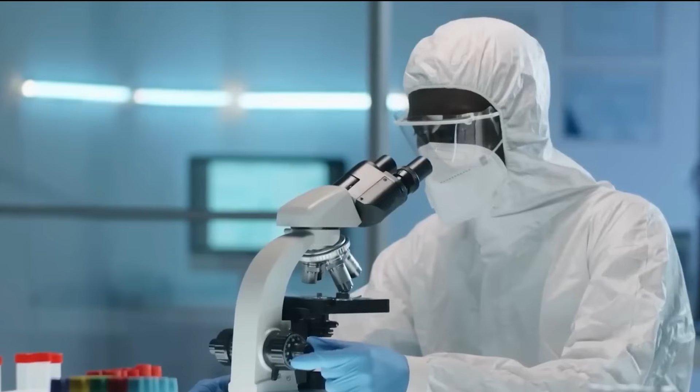They engineered a synthetic, biomimetic breakthrough using agricultural waste and polymer bonding. It does not just mimic wood, it completely outperforms it. This material is entirely fireproof, waterproof, and costs a fraction of the price, terrifying global timber giants.

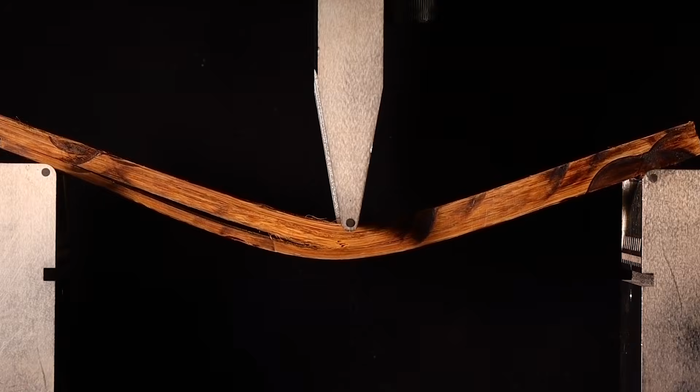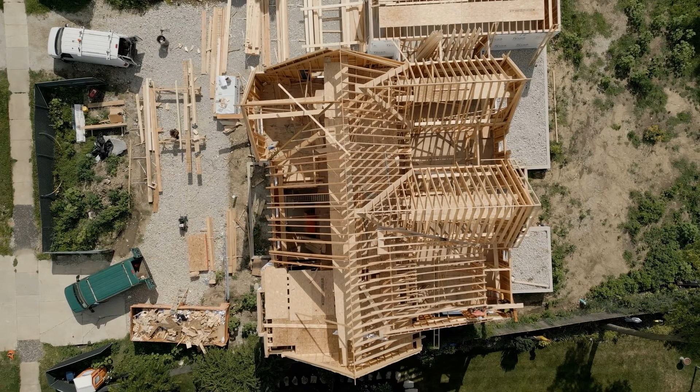To understand why this new discovery is such a massive deal, you first have to appreciate why timber has held an absolute monopoly on human construction for thousands of years. It's not just because trees grow out of the ground for free. It's because wood is genuinely one of the most mechanically brilliant materials ever created. On a microscopic level, it's a masterpiece of natural engineering.

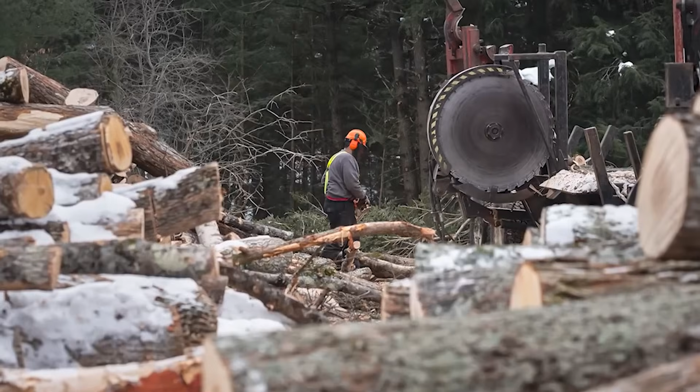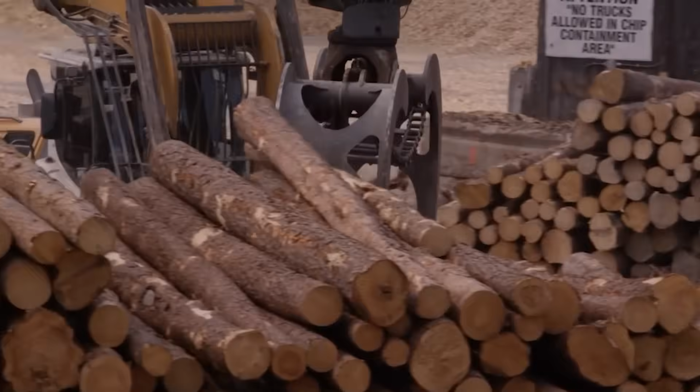Wood is made of long cellulose fibers bound together by a rigid organic polymer called lignin. This exact blueprint gives it a phenomenal strength-to-weight ratio. It can bear immense vertical loads while remaining flexible enough to bend during high winds or minor earthquakes. It acts as a natural carbon sink, provides exceptional insulation, and can be shaped with basic hand tools.

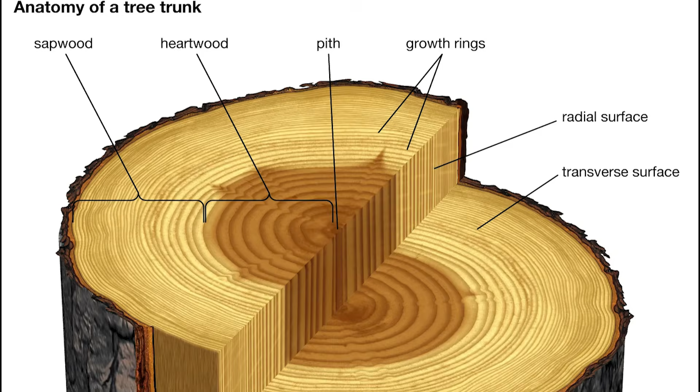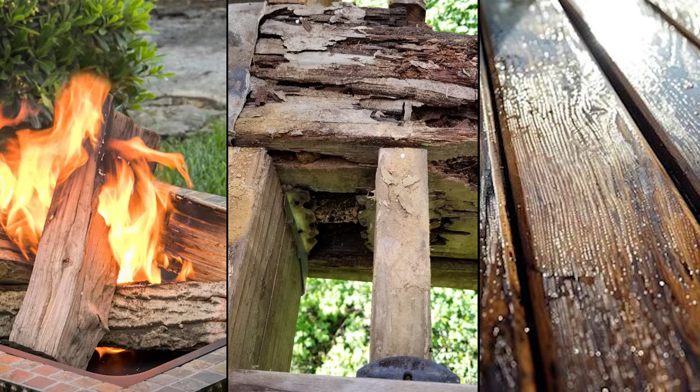For most of human history, nothing else came close, but wood has a massive built-in structural flaw: biology. Because it's organic, it rots. It warps when it gets wet. It treats fire as fuel. And worse, it takes decades for a tree to mature enough to be harvested for high-grade structural lumber.

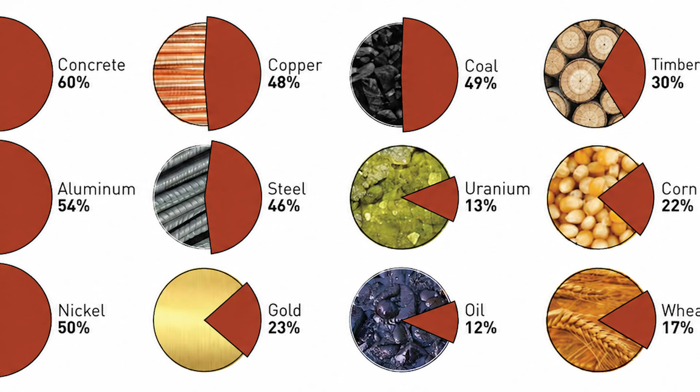Think about the sheer scale of modern development. China alone, in its massive push for urbanization over the last 2 decades, consumed more raw timber and building materials than Western Europe used in an entire century. The planet simply can't grow trees fast enough to keep up with that velocity.

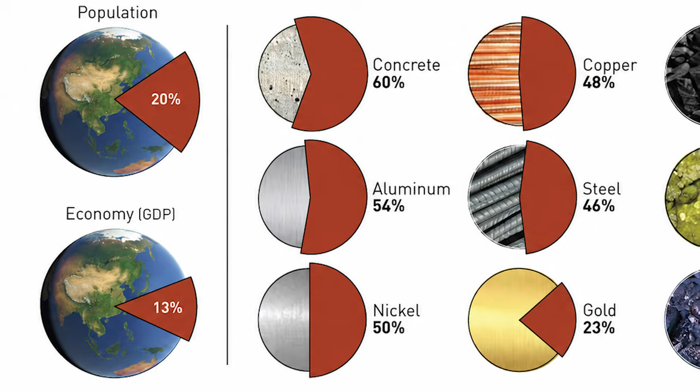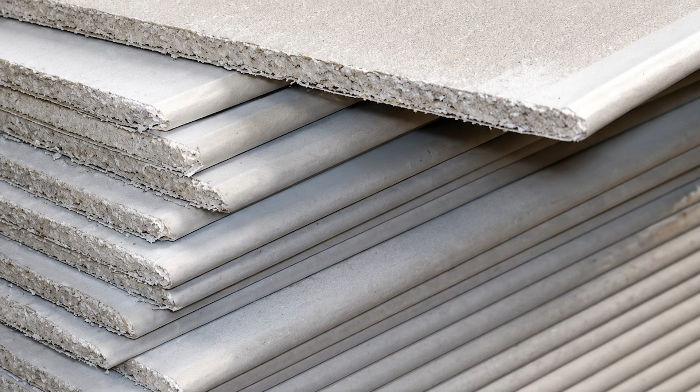For years, scientists tried to create alternatives, like wood plastic composites and fiber cement boards, but they failed fundamentally. They were either too heavy, structurally weak under tension, toxic to recycle, or too expensive to compete with a raw log. The question left for engineers was simple. What if the mistake wasn't trying to copy what wood looks like, but failing to replicate how it behaves at a molecular level?

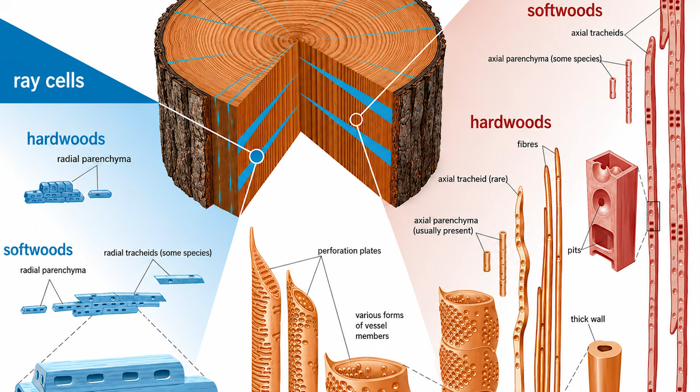To understand this breakthrough, you have to look at how a tree actually grows. Natural wood is basically a massive network of microscopic tubes, all aligned in a single direction. That alignment is exactly why a log is incredibly strong along the grain, but splits wide open if you hit it across the grain. A research team at the Chinese Academy of Forestry decided to completely hack this organic geometry.

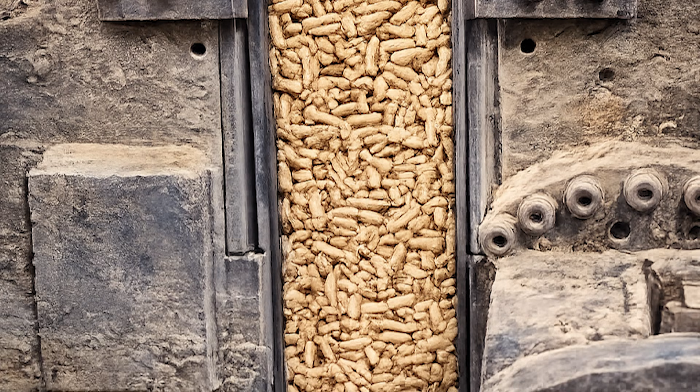Instead of cutting down old forests, they harvested agricultural waste, leftover wheat straw, hemp, and processing scraps from fast-growing bamboo. They stripped this waste down to its raw cellulose fibers. Normally, when factories make synthetic boards, they just mix loose fibers with glue and randomly press them together. It's weak. The Chinese team did something radical.

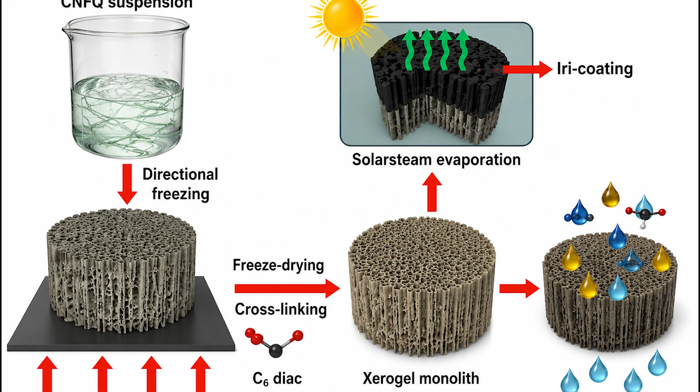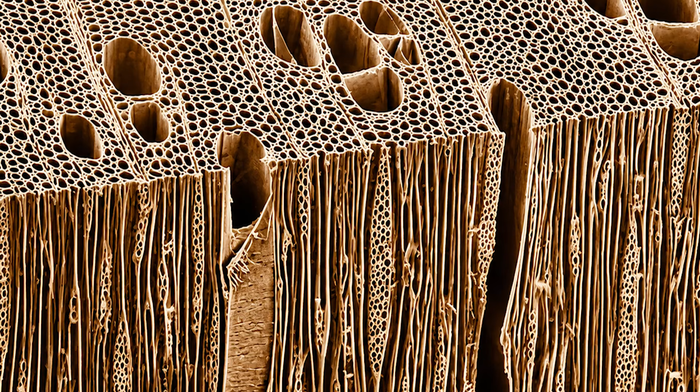They passed a liquefied fiber slurry through a specialized directional freezing process. As the water froze, it forced the raw fibers into perfectly straight, parallel channels, perfectly mirroring the microscopic grain of a 200-year-old oak tree. Next, they infused this perfect matrix with a biosourced resin and blasted it with high-pressure steam.

Under immense heat, the resin didn't just coat the fibers, it cross-linked with them chemically, simulating millions of years of natural petrification in mere hours. The result? The material's internal gaps dropped by over 80%.

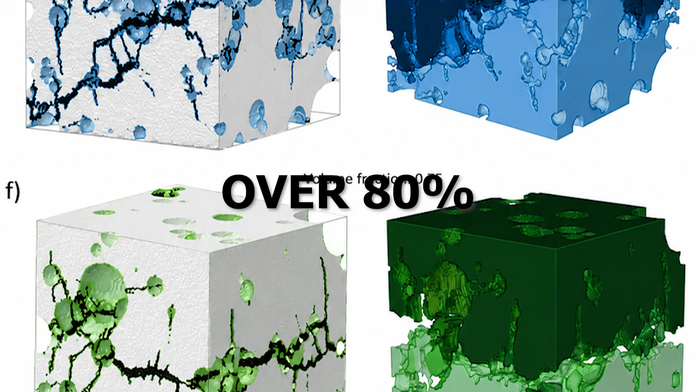This matters because those microscopic gaps are where every single wood problem begins. It's where water seeps in to cause rot, where termites crawl, and where oxygen hides to feed a fire. By crushing those voids, they eliminated wood's greatest weaknesses in one move.

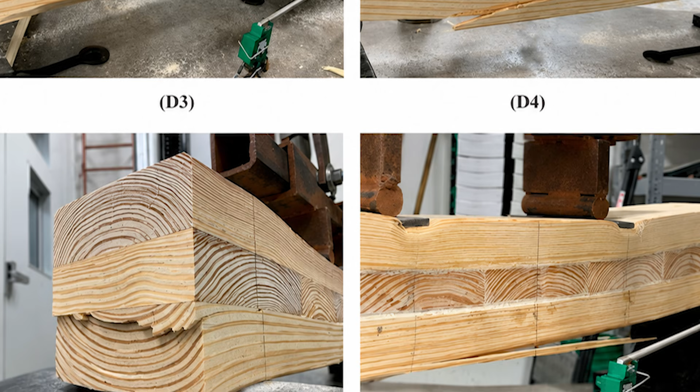Laboratory tests showed a tensile strength 120% higher than hardwood and a Class A fire rating. It literally refuses to hold a flame. The best part? It locks up agricultural carbon that would otherwise be burned in fields.

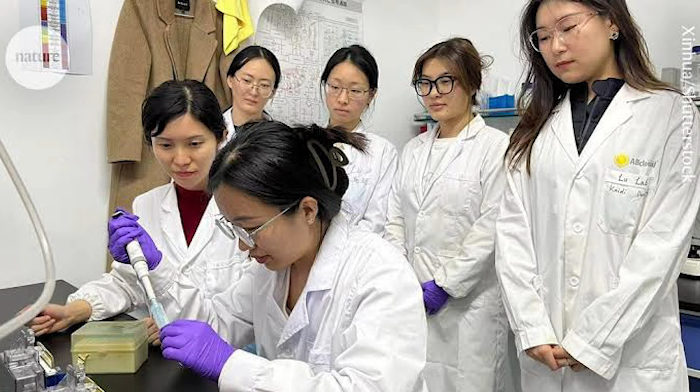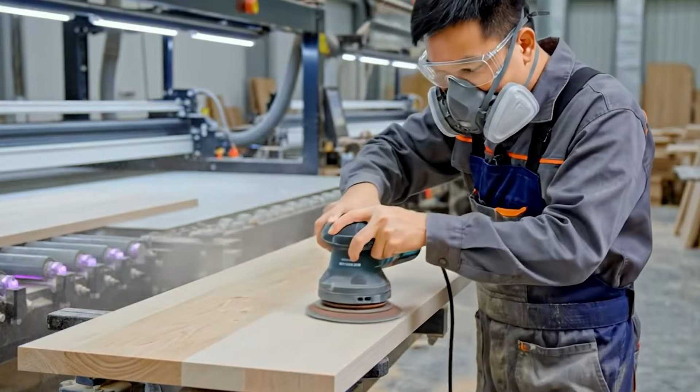While scientists were busy publishing papers on this biomimetic wood breakthrough, a completely different disruption was quietly happening right next to them. And this one didn't just rethink what we build with, it completely rewrote how fast a building can be put together. It's called hyper-compressed bamboo fiber tooling, and advanced infrastructure firms in southern China are already scaling it up.

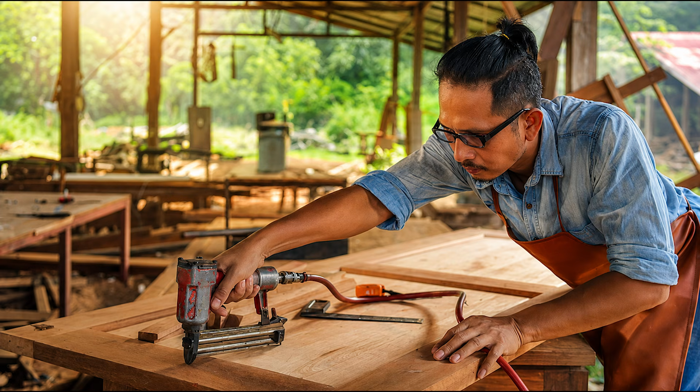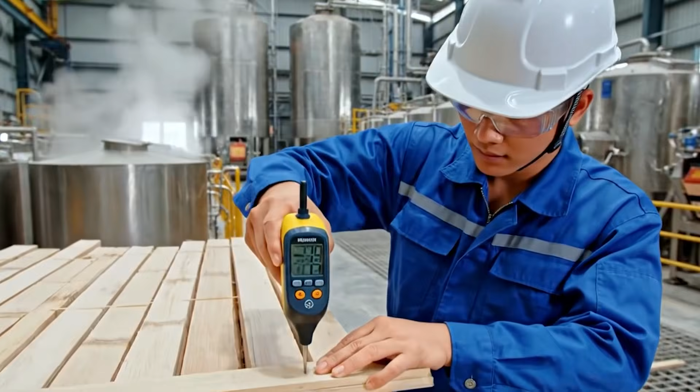Think about traditional timber. It's slow. You need heavy carpentry, precise kiln drying, and weeks of on-site prep just to stop the wood from warping. This new method skips all of that by treating engineered biowood like a high-tech polymer. The material is extruded straight out of the machine into massive, interlocking tongue-and-groove panels. They even stamp internal channels for electrical wiring and insulation right into the core during the press.

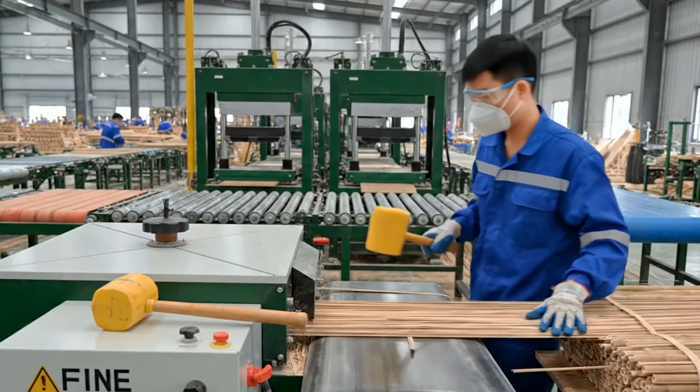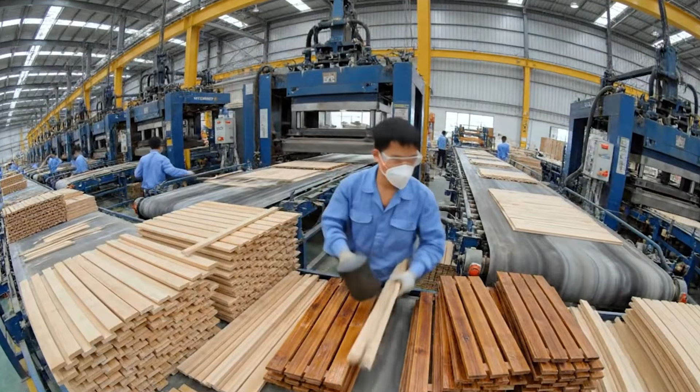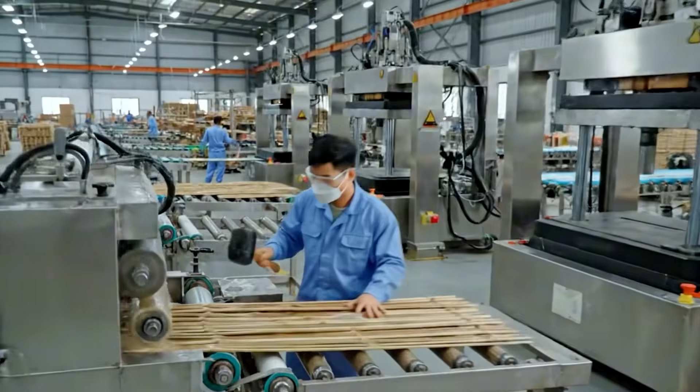But here is the real game changer: how it handles environmental stress. In humid tropical zones or coastal climates, normal wood is a maintenance nightmare. It warps, rots, and needs constant chemical sprays that leak into the soil. This material? It doesn't react to moisture at all. In testing chambers, even after being fully submerged in salt water for a year, its structural variance was less than a fraction of a millimeter.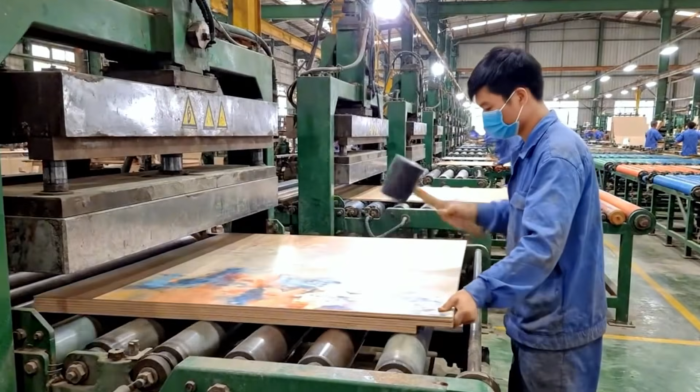When you fuse raw strength with lightning-fast assembly, the economic impact shifts entirely. That undeniable math is exactly why global markets are scrambling to lock down the rights. In the global commodities market, sentiment doesn't matter. Idealism doesn't alter supply chains. Only math does. Normally, changing international building codes takes decades. Why? Because when structural materials fail, the cost is measured in human lives.

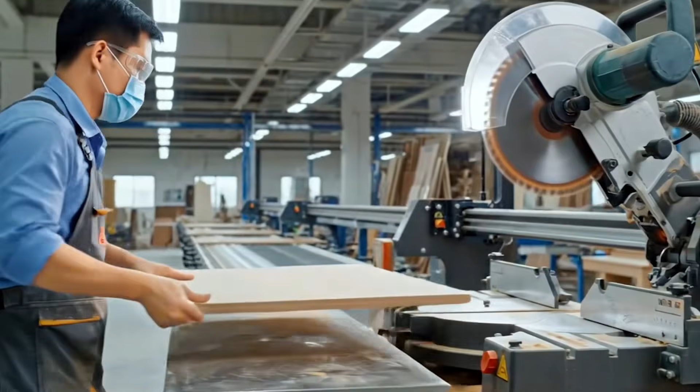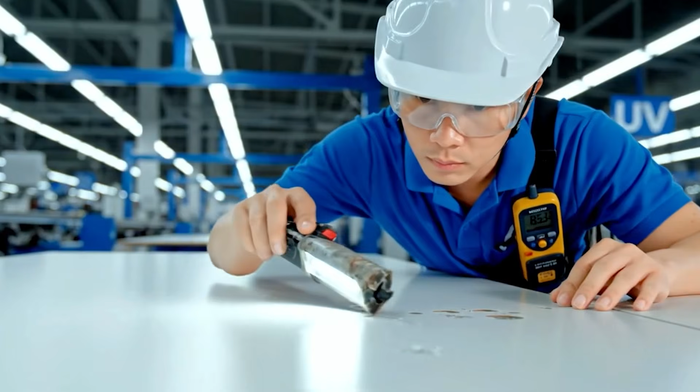Yet right now, Western markets are completely skipping the usual hesitation. Look at the receipts. Trade data confirms a massive spike in export volumes of these advanced biocomposites shipping straight out of Ningbo, China, to major distribution networks across Germany, Japan, and the UK. Major Scandinavian furniture giants and European prefab developers have already signed long-term procurement deals to integrate these synthetic beams.

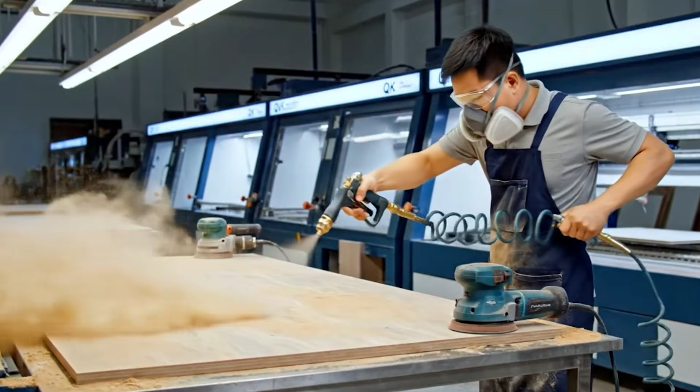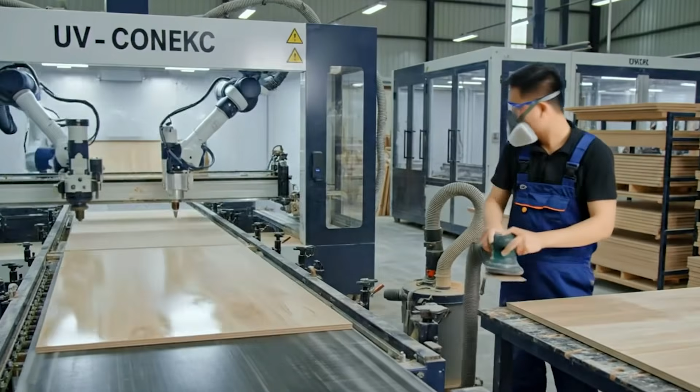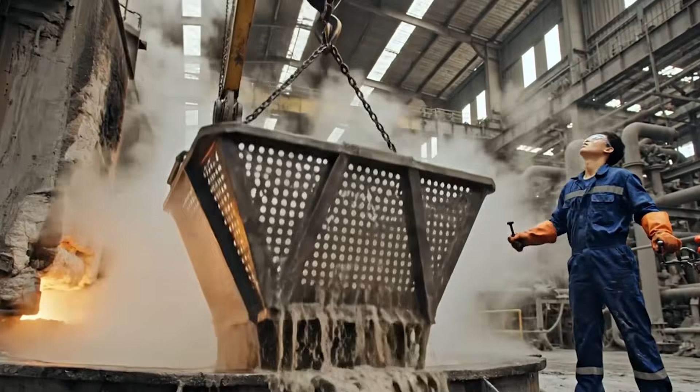Why the sudden rush? It isn't because these corporations suddenly grew a conscience. It's because in regions with strict carbon taxes, swapping old-growth timber for certified carbon-negative agricultural waste slashes regulatory costs overnight. If we replaced just 25% of global timber demand with this compressed biomaterial, we would save roughly 3.7 billion trees a year. That offsets more carbon than taking every single diesel truck in North America off the road permanently.

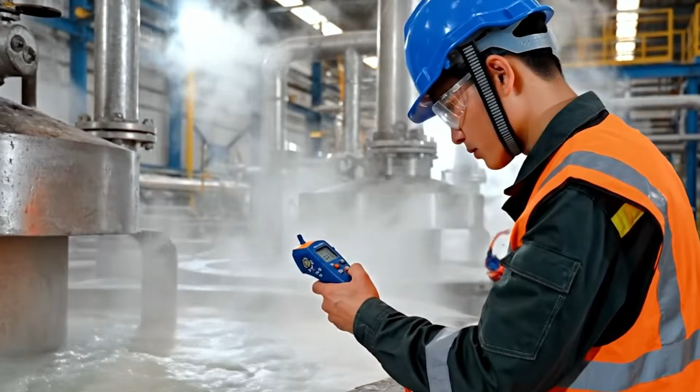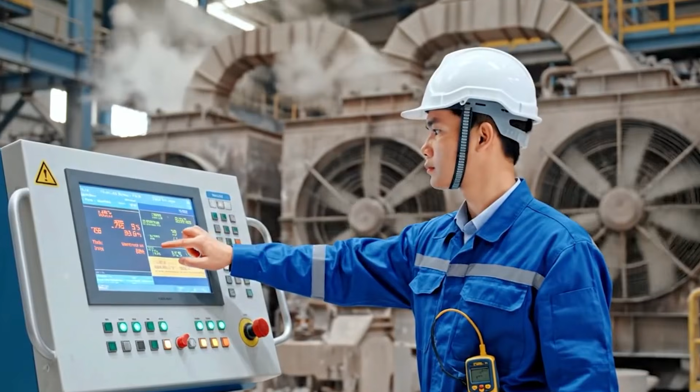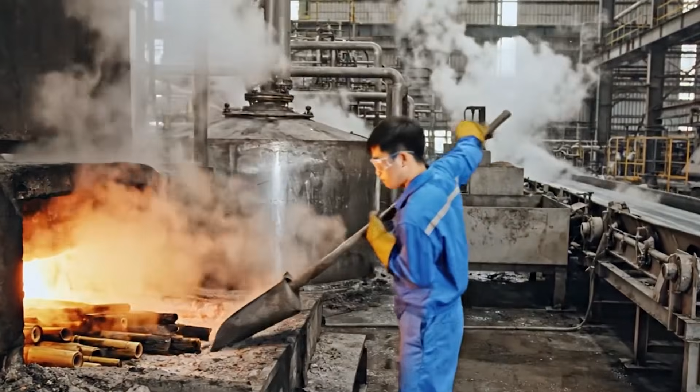But let's be entirely honest about the roadblocks. The traditional timber industry is backed by massive political infrastructure, sawmills, and deep consumer habits. People simply like the smell of real wood. Plus, manufacturing this biomimetic alternative requires ultra-high-pressure directional freezing machinery that standard factories don't own.

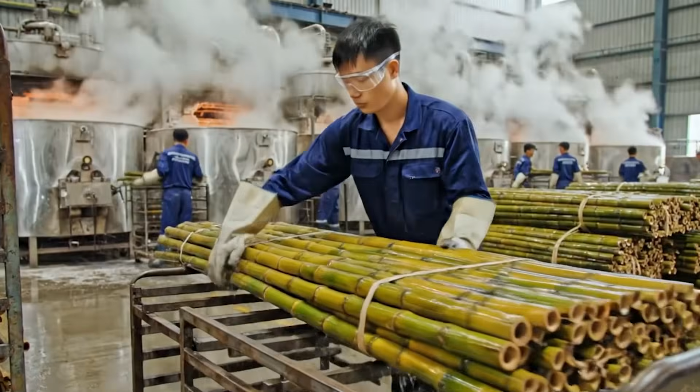While wealthy nations can afford to retrofit their plants, developing countries face a massive financial barrier. This isn't a science issue anymore. It's a political and economic hurdle. But for the first time since the dawn of civilization, chopping down forests is no longer an absolute necessity.

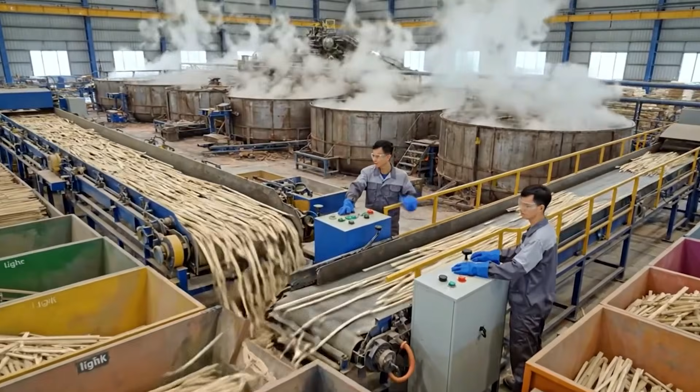Would you live in a home built entirely from high-tech, compressed agricultural waste, or does real timber have an irreplaceable soul science can't replicate?